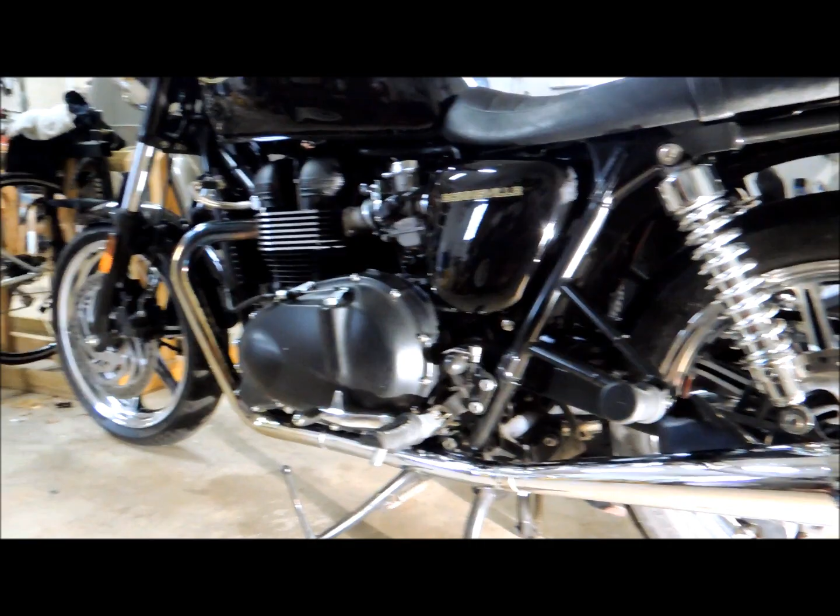I'm going to be doing the brakes on my 2010 Triumph Bonneville today. The rear pads and the front pads. And honestly, the pads are in fine shape. There's nothing wrong with them. But I wanted to just remove the calipers and take a look at what's in there as far as dirt and debris and clean them up a little bit. And while I'm there, the pads are so cheap that I'm going to replace them with some newer ones that should be a little bit better performance anyway.

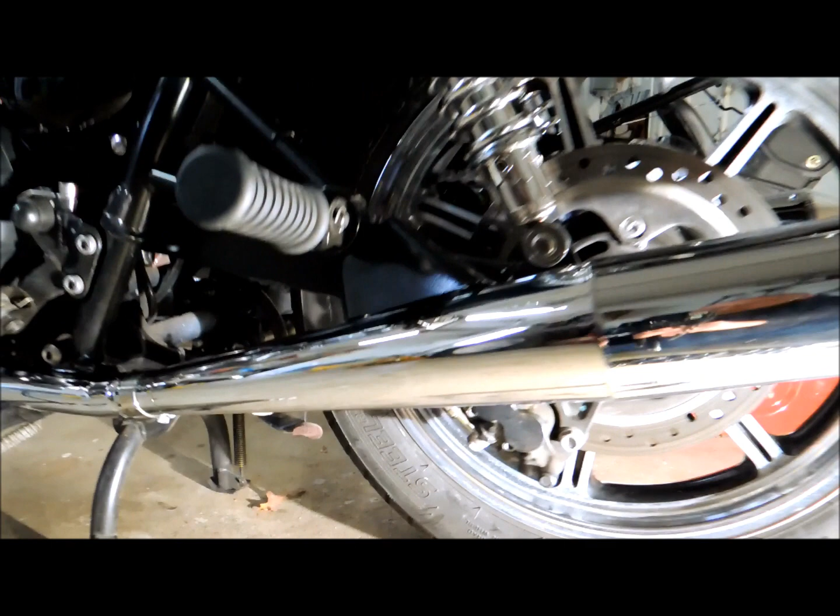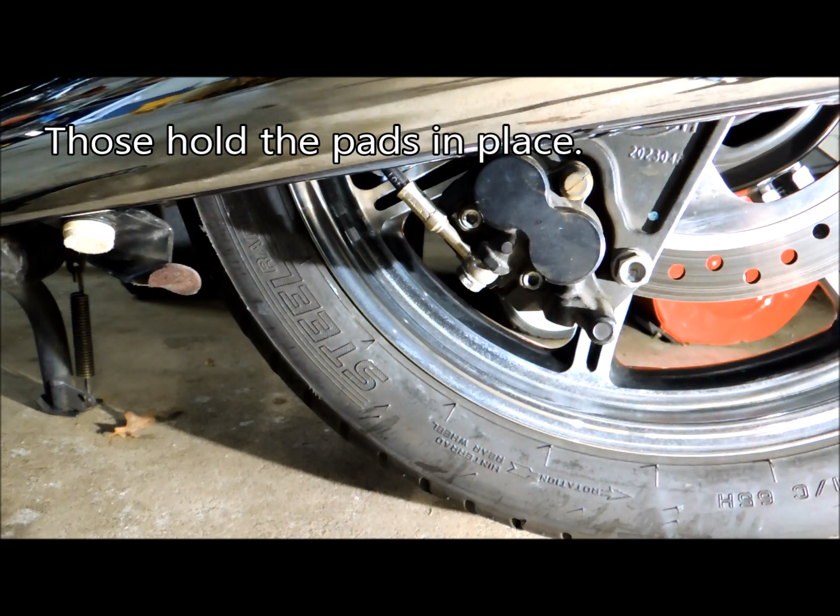So I'm going to start with the rear caliper. And I'm actually going to do some of this with the camera off because it's hard to get in there to see. But just to show you what I'm going to be doing, first there's two Allen bolts here, a 5mm Allen bolt here and here. And I'm just going to loosen those with the caliper still on the bike just because it's easier to do that. And those are what hold the pads in place.

And then to remove the caliper to get at the pads, there's a bolt here and one more up here you can't see off camera, which is a 14mm, and I'm just going to remove those and drop the caliper down. Sometimes it's easier to take the exhaust off, but I'm just too lazy to do that, so I'm just going to leave it in place. So let me remove the caliper and then I'll put you back on camera. I'm trying to give you another shot here.

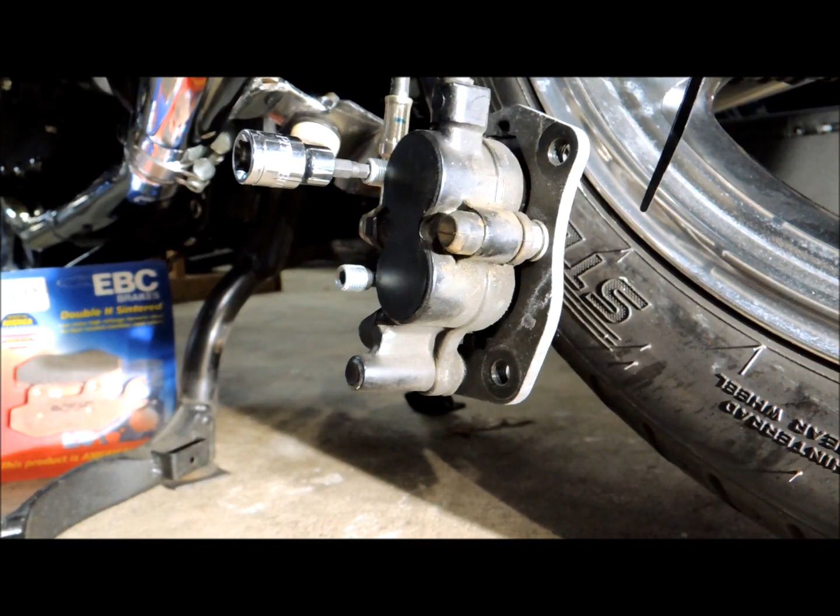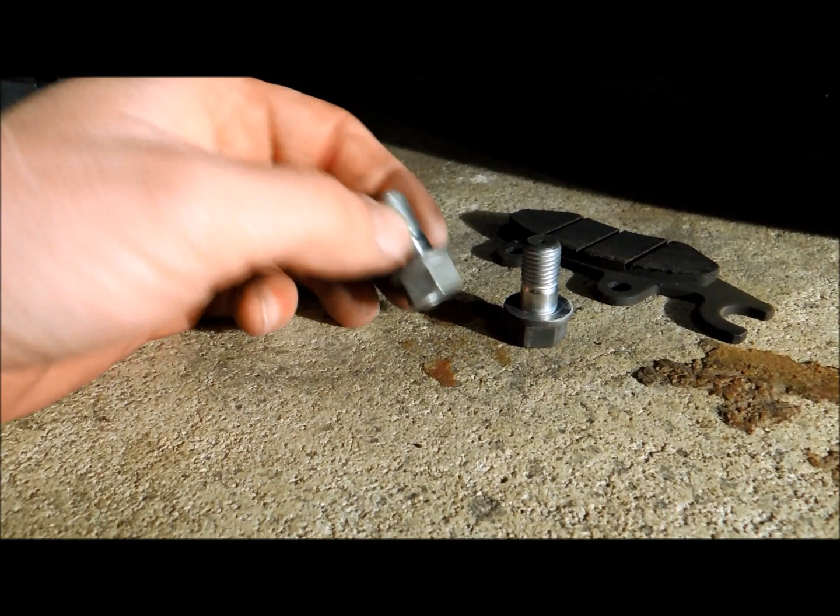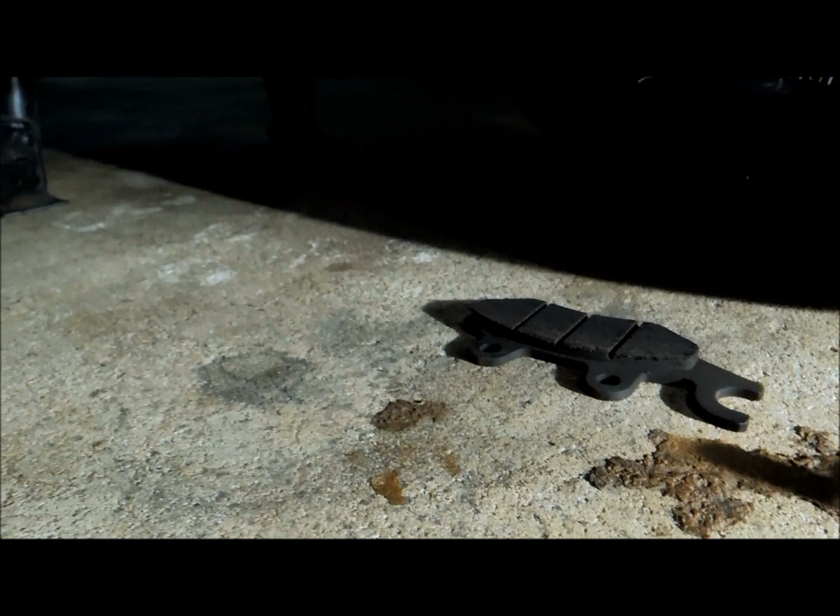I've got the caliper off, and that's from these two little bolts right here, which are actually quite clean and were not difficult to get off, which I'm pleased about. I actually have one of the pads out, and you know it's not bad at all. There's definitely more life there, but I did purchase new ones because they're pretty cheap. So since I got this thing off, these may be slightly better quality than the ones that came stock, which is what I got on here.

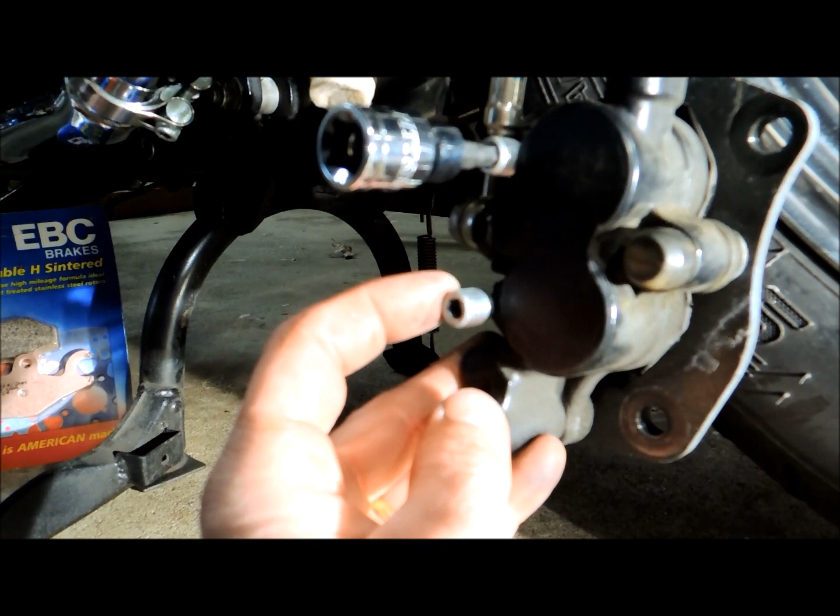And right now I'm just removing those two bolts that hold the pads in place. It's a 5mm Allen wrench, as I mentioned. I'll try to get a shot in here. You shouldn't really leave this caliper hanging, but that's what it looks like. You can see the bolts, that shiny bolt there on top, starting to come out. So let me just finish removing these and put the camera down for a second.

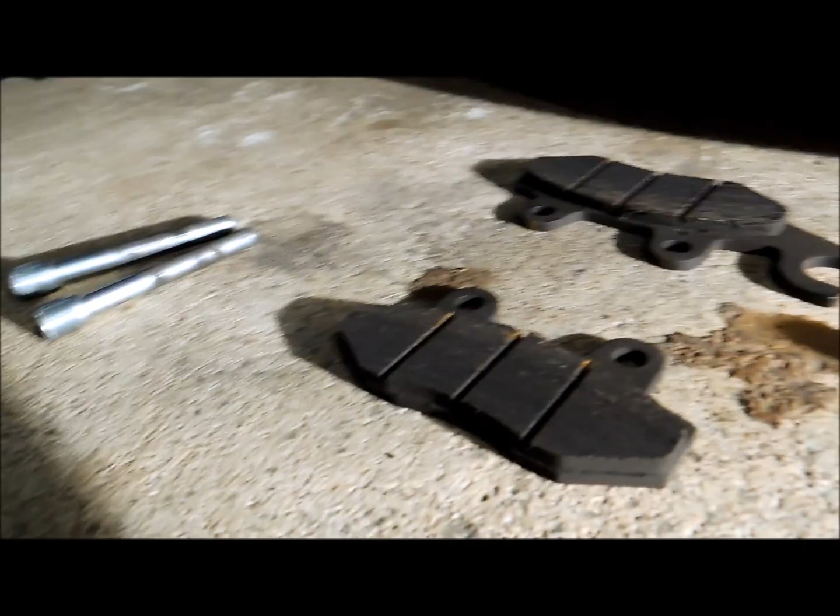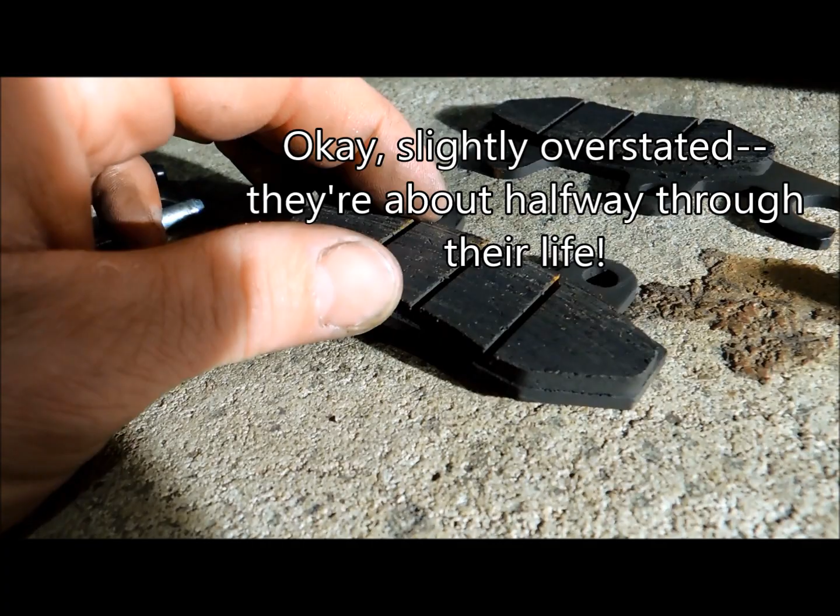Okay, I have the pins out that hold the pads in place, and they're in good shape. I didn't want to see any corrosion, and there's just a little bit of dirt there. It's nothing big at all. Those look excellent shape. So I'm just going to clean them up. And again, these pads are practically new. I mean, they don't need replacing, but it was so cheap to buy the new ones, so I'm just going to replace them. And I'll show you the inside here.

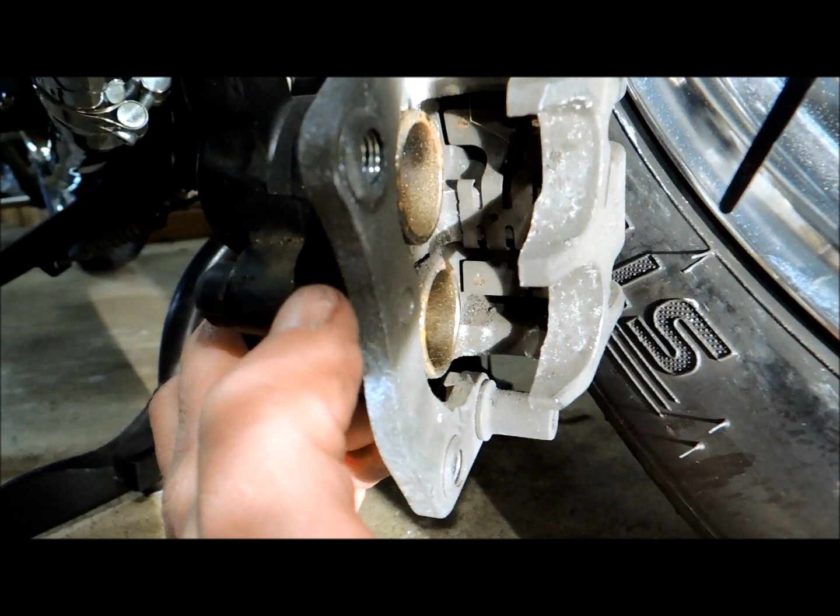Oh boy, it's hard to get the camera in here, but notice there's a spring clip. You want to make sure that's in good shape. And when I put the new pads in, they may be slightly thicker. So I'm going to want to push these pistons back in. And I'm going to clean off the caliper just with warm soapy water in here just to make sure there's no dirt on the piston itself that I'm pushing into the seal.

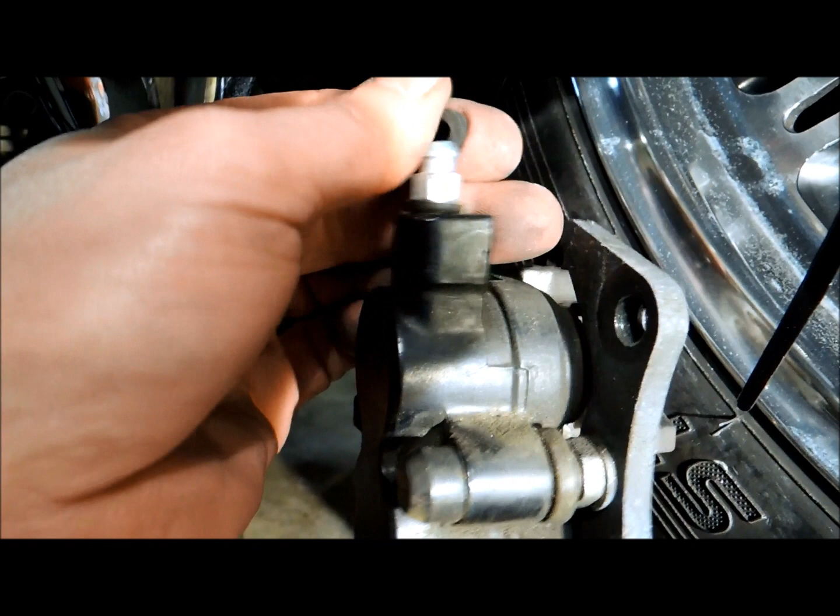And then I want you to pay attention to this right here. I'll take this little rubber cap off, and that's the bleeder, which I am going to use because I want to make sure I replace all of the brake fluid in there with new brake fluid, which is a good idea to do as you're changing the pads.

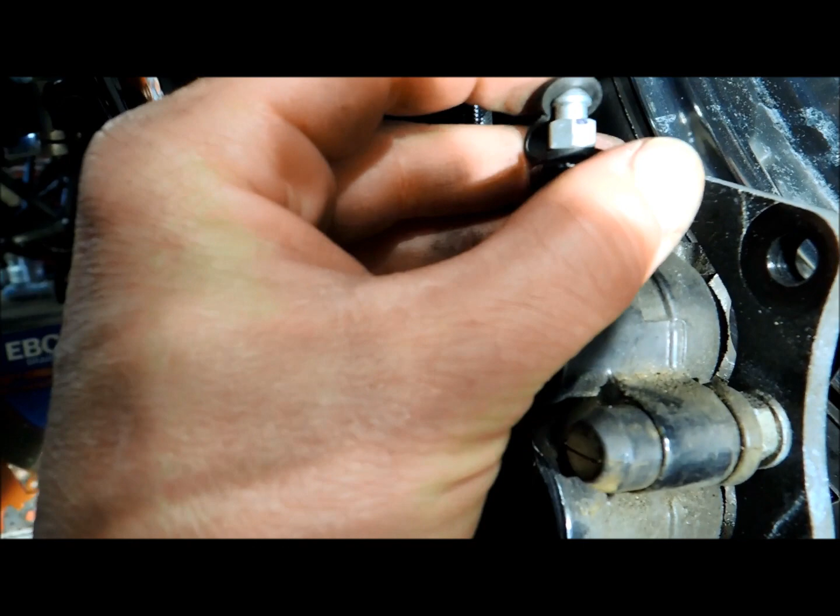This is a 2010 and I'm recording this in 2014. There's about 7,000 miles on this bike, I guess, or a little more than that actually, maybe 7,500. So again, it's in very good shape, and I was hoping not to see too much corrosion or anything here, and I don't, so I'm very pleased with what I see.

But it's just a good idea to keep this clean, and you do some maintenance once in a while. And for the cost of the new pads, I don't mind putting some new ones on. The fronts may be a little bit more worn, we'll see in a minute, but I'm just going to clean this up with some warm soapy water and we'll put it back together.

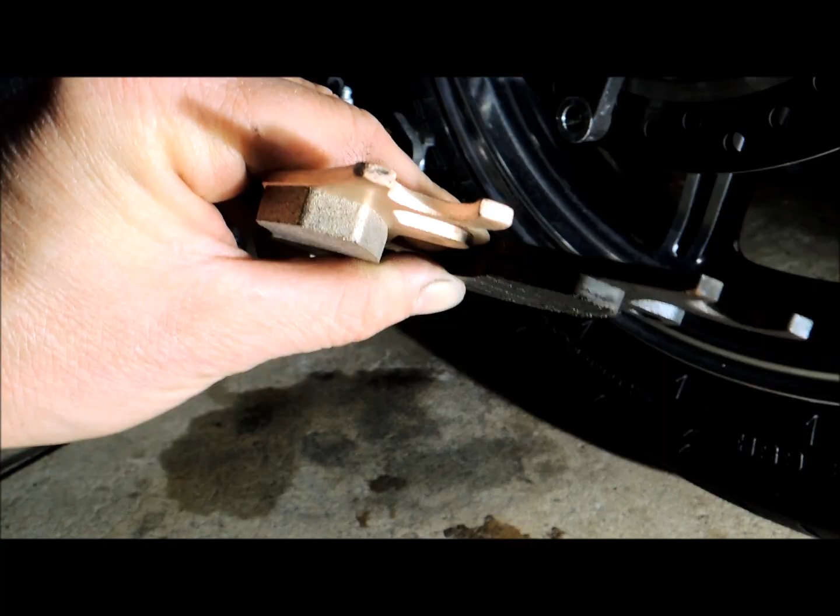Just try to give you a better shot here of the new and old disc pads. It's pretty tough to see here, and I'm trying to hold it with the camera and the light and everything, but the new pad is actually not quite double the size of the old one. So there is some more wear there than I was aware of, but there's still plenty of life on the old ones. But the other thing I wanted to make you aware of, I've now cleaned this up.

Let's see if I can get the camera in there. And I got one pad in there. There's springs, you want to make sure that the pads are seated correctly in that spring in the back there. Other than that, this is pretty simple. I made sure the pistons can move easily, so I could move it back and forth with my fingers, and then I pushed them both in so that I can seat the new pads, which are a little bit thicker.

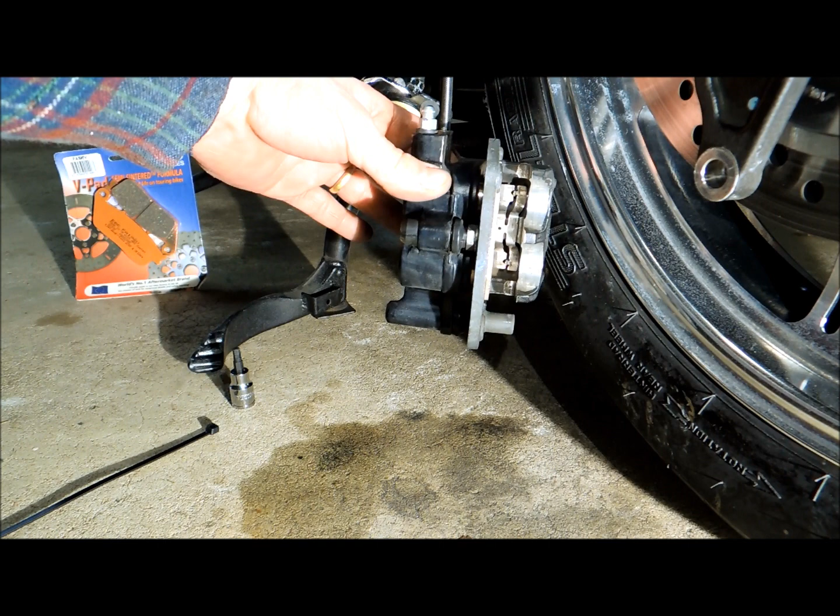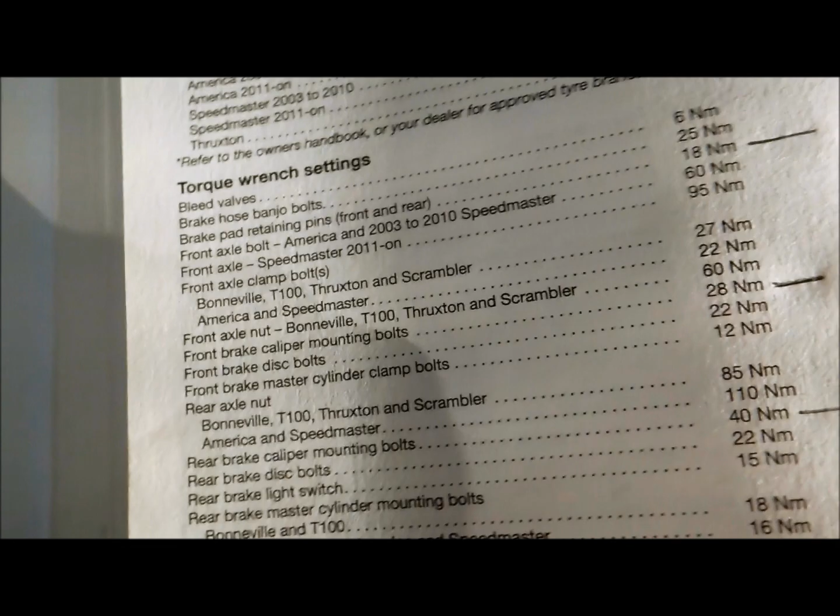And other than that, it's just a matter of putting the new pad in, and then we'll remount the caliper on the back here. All right, as I'm tightening this caliper back up, I just want to give you some information that might be helpful for you. They do give torque wrench settings, although it's in the wrong format for me, so I've converted it over here for what I'm doing.

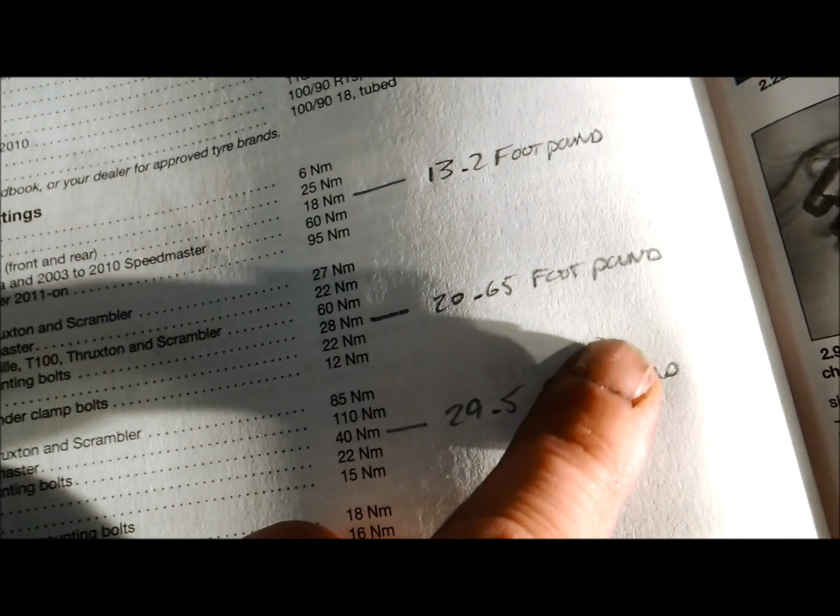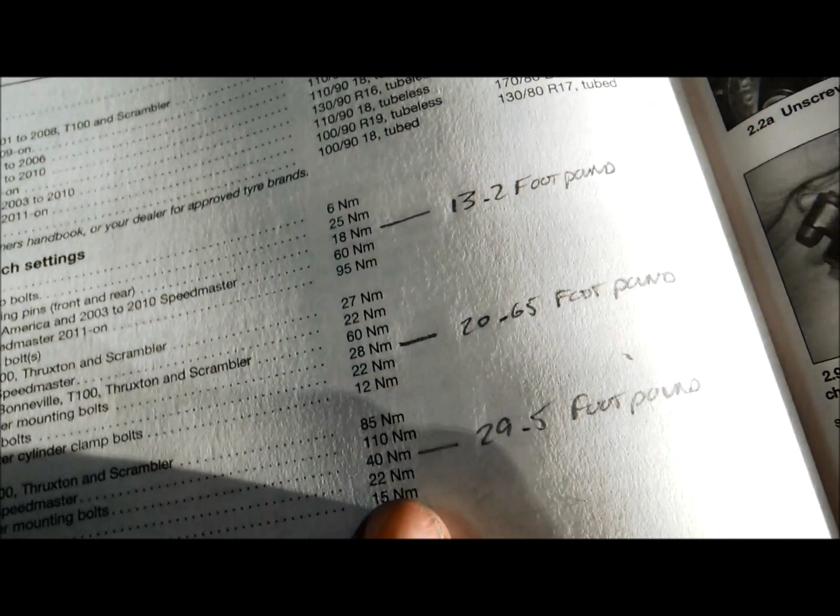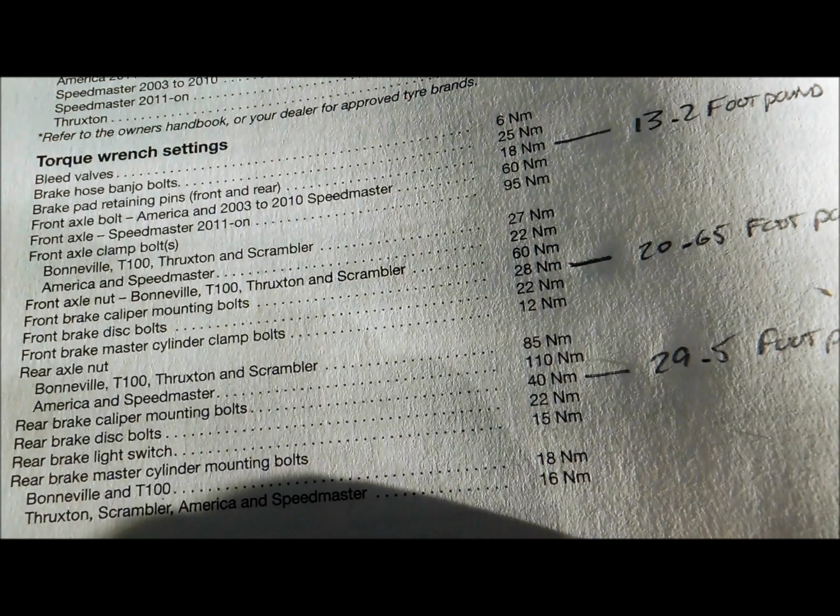The pad retaining pins on the front and back are 13.2 foot-pounds. And interestingly, the front caliper and the back caliper have different settings. I'm not sure why, but the rear caliper is 29.5 foot-pounds, and on the front, when we get to that, it'll be 20.65 foot-pounds for the bolts that attach the caliper to its frame there.

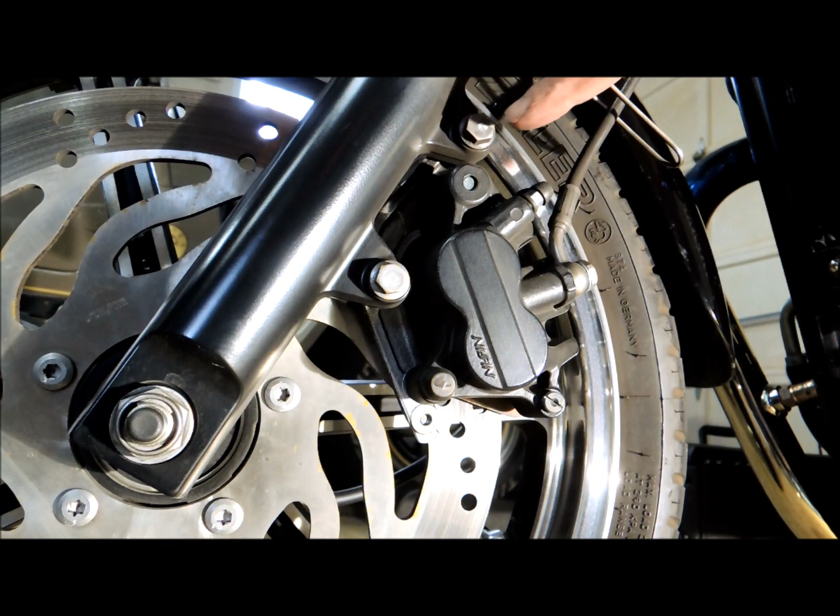Okay, I'm here on the front now, and this is going to be a little easier to show you on camera. Again, there's two bolts that hold the caliper on here and here. This time they're a 12 millimeter for some reason. I don't know why they can't standardize on that. And then there is a little pin that holds the pad in place here, but it's covered up with a little plug, I guess for corrosion. I'm not sure why. So you got to, boy, I got to go look for that.

You take that little plug out first, and then you're back to the 5 millimeter Allen wrench. So I'm just going to loosen that up just so it's not difficult. And then switch to my 12, and we'll loosen up these bolts, which aren't really that tight. Alright, now let me just move the camera and get this caliper off the way. I'm trying to get some better light for you.

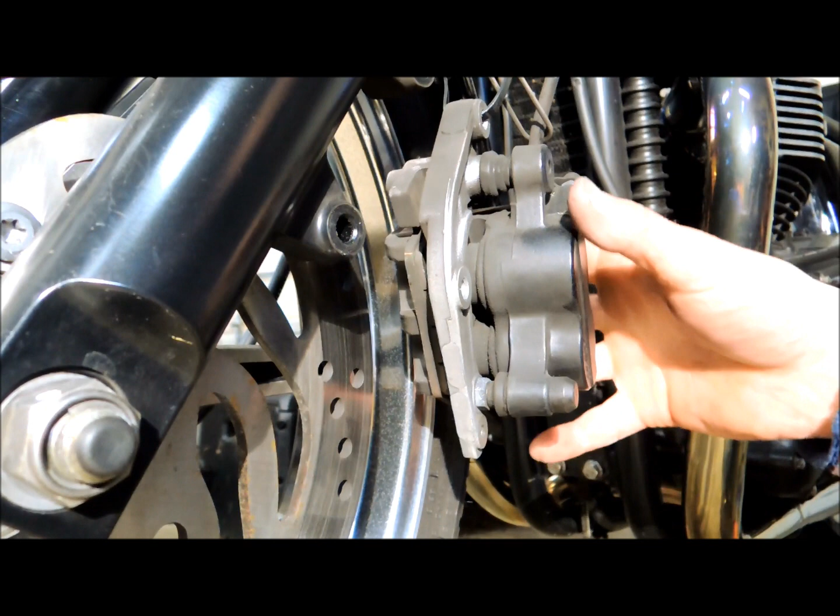I've got the caliper removed now. Up here, I don't know if you can see that on camera, I have a little plastic tie that I've tied off to the bike up top here, just so the caliper's not hanging on the cable. So hopefully you can see this, but here are the old pads in place. And again, it's not any emergency, although they are somewhat worn. It's got 7,560 miles on it, I just looked.

So we're just going to take these pads out. Oh, I didn't take the pin out yet. That'll help. First, we've got to take this pin out in the bottom, which I loosened when it was still attached to the bike. And just like the rear, you got to remove this totally. It's under a little bit of spring pressure, so it's kind of a pain to get out. There. Alright, so there's the pin. Looks like it's in good shape.

And the pads just pop right out. And these are the original pads. They're really not awful, but they are getting down there. I mean, I could get more life out of them, but I'm not that cheap. So the new pads are here. Let me just get these open and we'll put them in.

Alright, just like I did with the rear brake, I'm just going to give these things a little bath. Don't want to lose that spring there. And I'm mostly concerned about this area right where the pistons go into the seals. I don't want any dirt or stuff in there to damage the seal. So I'm just going to clean this out with some warm soapy water, and I'll probably dry it off with some brake clean just to make sure all the water's out of there and we're in good shape.

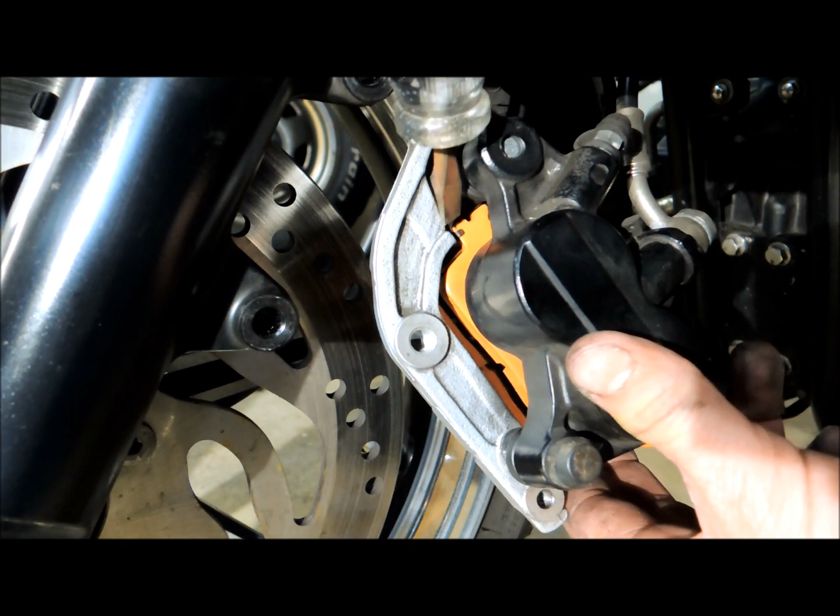And then up top, boy, I don't know if I can get this. Make sure there's a spring up here. I need something to point with. There's a spring up here, and there's just a little tab right there. I don't know if you can see it, but that needs to be kind of holding the pad in place. So as long as you get those two springs correct, there's not much else to go wrong.

Oh, and by the way, I did check the pistons, cleaned them off first, and then pushed them all the way back into the cylinders after they were cleaned, so I didn't damage the seals. All right, so I'm just going to put this back on the fork of the bike, get it mounted, and then we're going to talk about bleeding.

Okay, I've got the front caliper back on, and now I want to bleed the brakes. The reason for this isn't that there's air in the lines. I mean, it's fine as far as that, but over time, brake fluid can get just dirty and dingy, and it can absorb water, I guess, even though it is a closed system. And it's just a good idea as it wears down to replace it with new fluid.

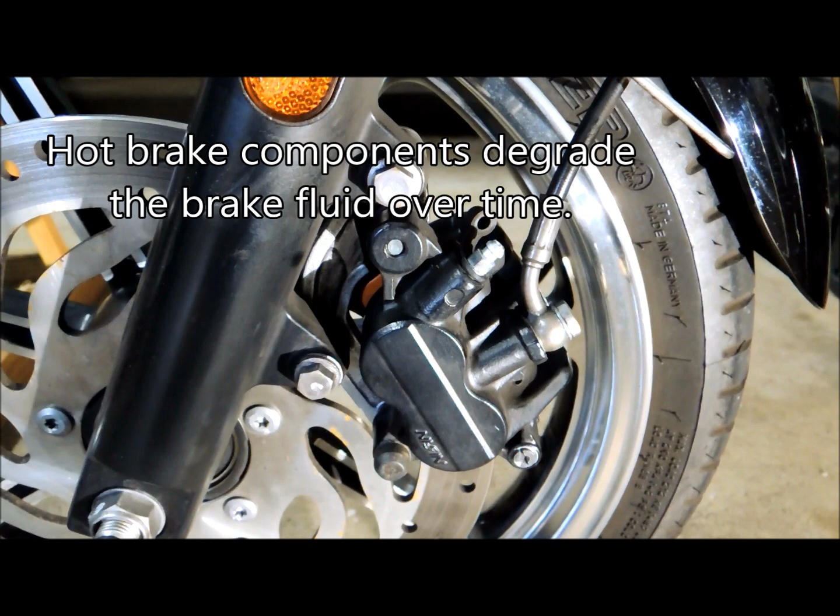And Triumph recommends this. What we're using is DOT 4, which I think doesn't absorb water as much as DOT 3 used to in the old days, but it still goes bad over time. So you want to replace it, and it's not that big a deal.

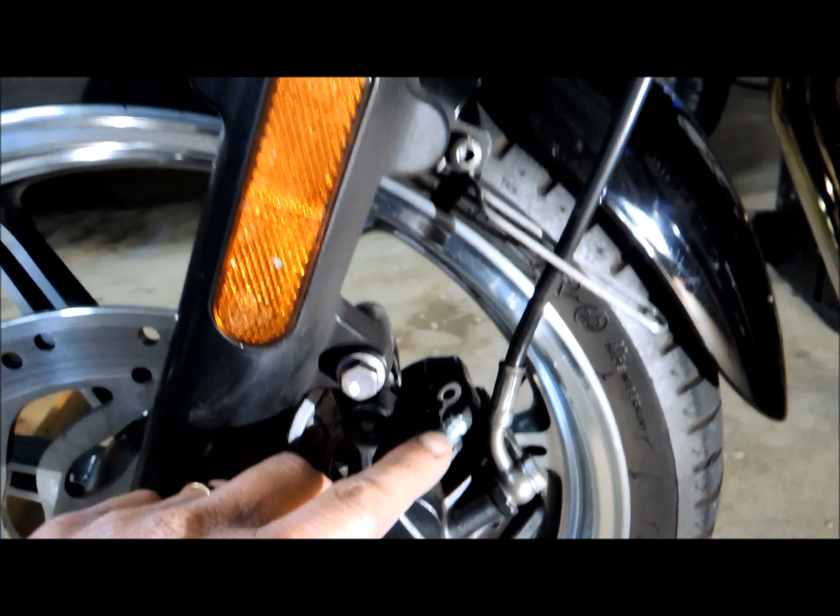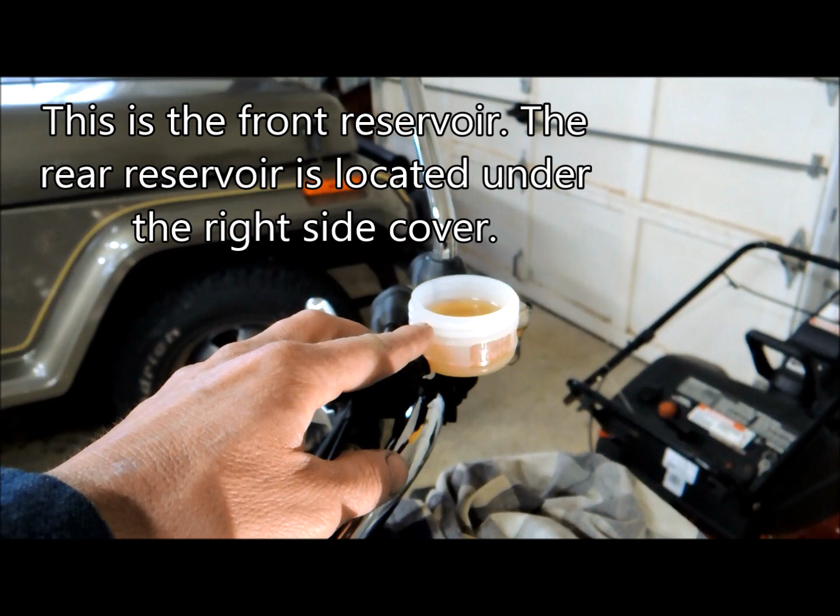Right here is the bleeder, and this is a closed hydraulic system, so if we go up top here, I've opened up the reservoir here, and actually you can see the fluid's a little bit yellow, and that's how you can usually tell when it's getting old. It gets a little yellow or brown. So I'm going to replace that, and it should be a much clearer liquid when we're all done. Now, the last thing you want to do is introduce air into the system.

So there's 3 ways that I know of to bleed brakes. One is you get a helper, and the helper pushes down on the pedal or pulls the lever, and then once that pressure is on the system, you take a wrench, you loosen this bleeder screw, which is hollow in the middle, of course, and the brake fluid will spit out. And then you need to retighten that before the person helping you is finished pulling down all the way, because otherwise air could get back in the system.

So it's a continuing cycle of pulling the brakes, loosening the screw to let some fluid out, tightening it back up before the lever hits bottom, and then you just repeat that cycle, and the fluid will eventually come through. And that's the old school method of doing it.

A newer method, which I prefer, but I'm not prepared to do today, is to replace this bleeder with what are called speed bleeders. Basically it looks just like this, but it's got a check valve in it, a ball bearing check valve, so fluid can only go one way. With that system, you loosen this up a little bit, and you can just pull that lever or push the pedal down repeatedly, and fluid will come out, but air can't get in because of that check valve. And when you're done, you just tighten it back up.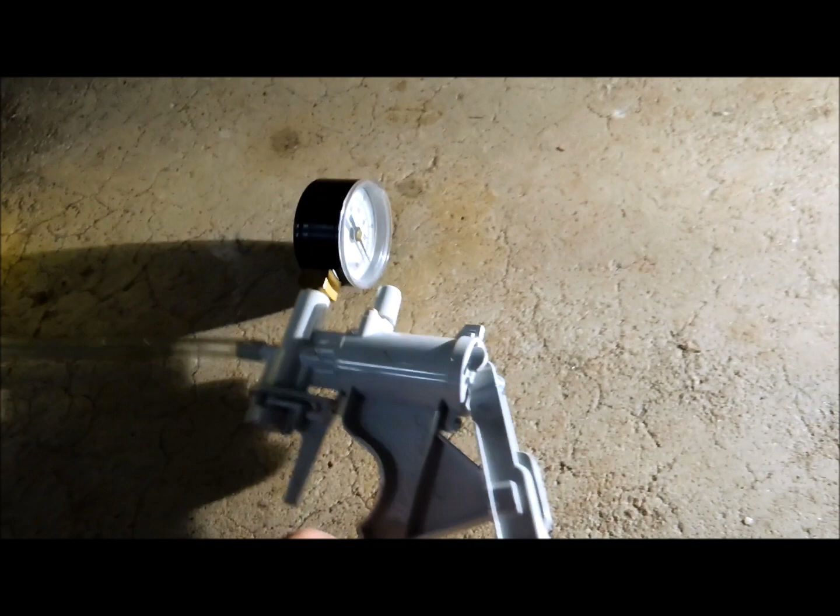Those work great, especially if you're alone. But I don't have that with me right now, and I'm not prepared to go out to the parts store and buy them. So I'm going to use a third method, which is this little device here. It's made by MityVac, and there may be others too. But basically, this is just a vacuum. It's used actually in automotive applications for creating vacuum or measuring vacuum. You pull this lever, and it creates a vacuum.

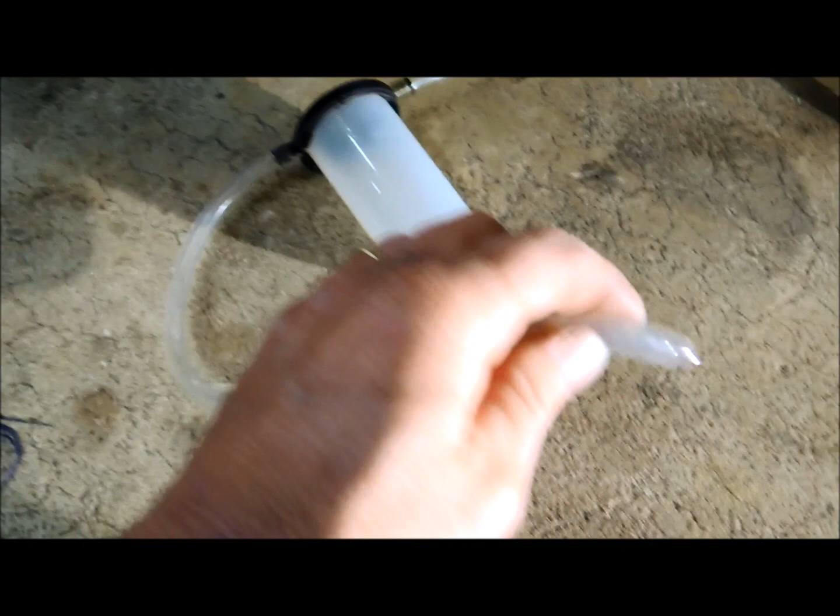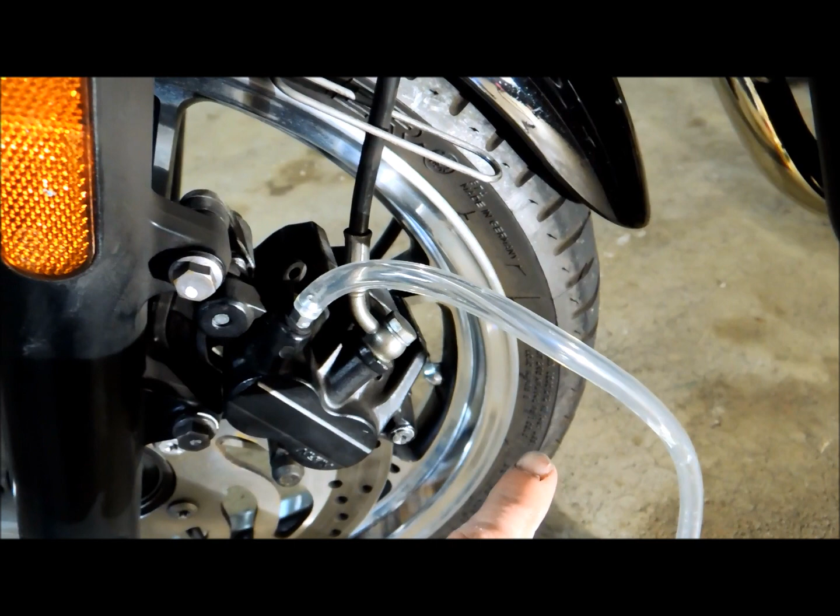So that tube is going to be connected to this little cup here. And then the rest of that tube goes here, and I'm going to see if I can do this with two hands here. I'm going to attach the end of this tube to the bleeder screw. So what happens is I pull that lever and create vacuum. Then I open up the bleeder screw, and the fluid will come out, but air can't get in because I have attached this tube here.

And then again, it's just a continuing cycle of creating vacuum and pulling the liquid out. I have this clear tubing here versus like a vacuum hose, which is opaque, so that I can see the fluid coming out. Because once I see the fluid is coming clear, then I know I'm good enough. And I also want to make sure that I don't see air bubbles coming through there as well.

Now, as I'm doing this, I need to pay attention and keep filling the reservoir so that I don't run low. But basically, I'm just going to pull that vacuum, pull the liquid out, and as I'm doing that, I'll clear the system. And I'm going to do the same thing in the rear. That way I get rid of all the old fluid and any air in the caliper on the front and the rear, and we should be good to go.

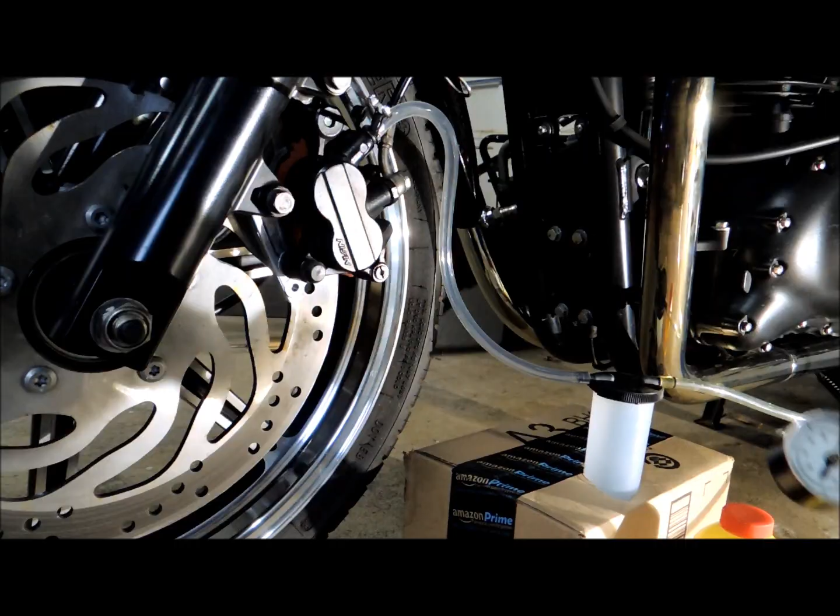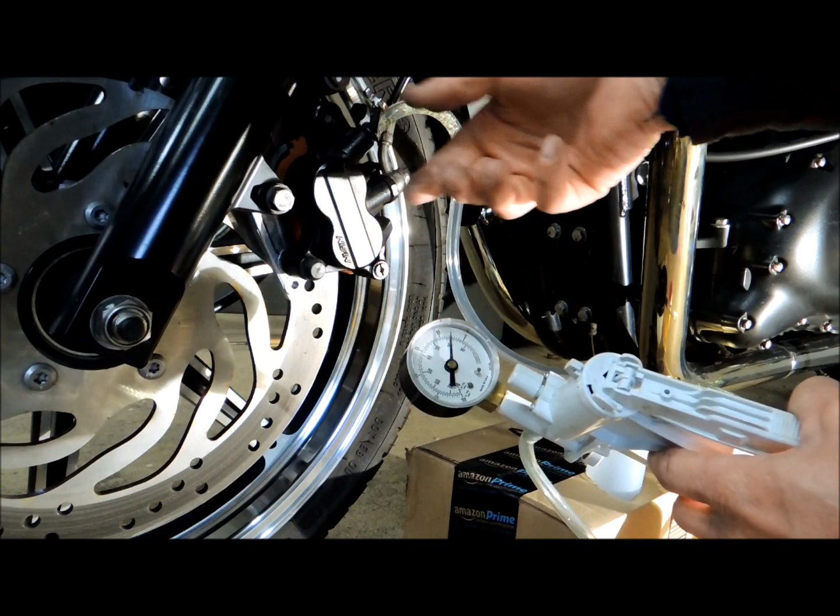Okay, let's see if we can give this a shot on camera. So I got some vacuum. I open up the bleeder. Here comes the fluid. I'm going to close it back up. There is some air there, but that's just because this tube is pretty big. Get some more vacuum. Open it up. There comes the fluid. Close it back up. I've been repeating this procedure until I get clear fluid coming out of here. This is closed right now.

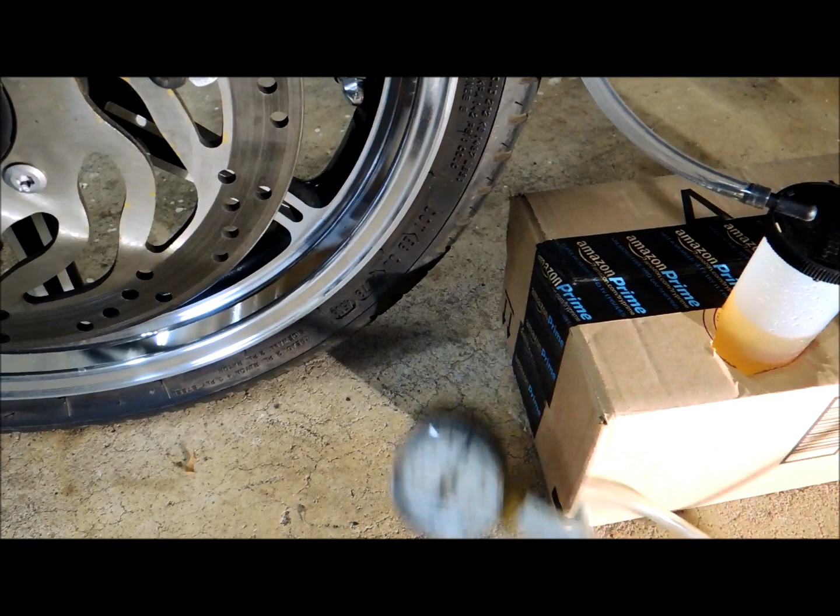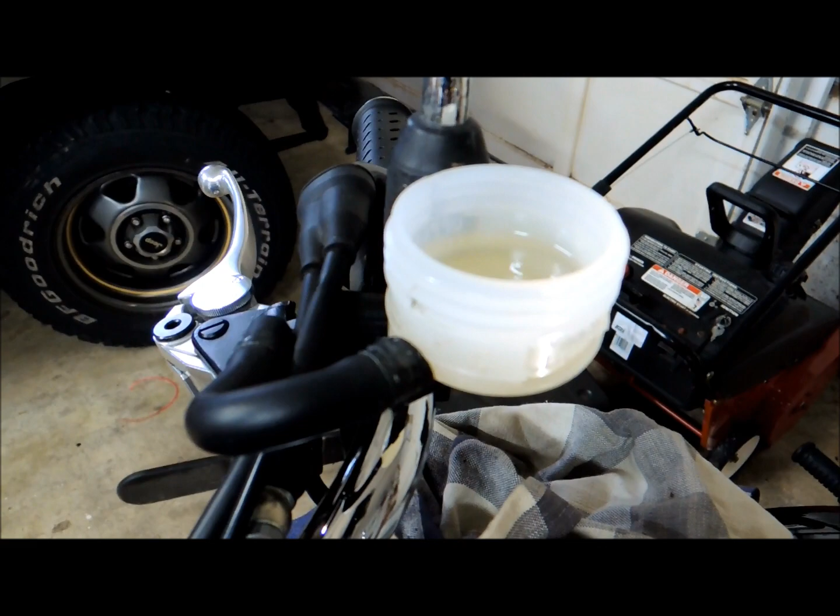And so I just make sure I get my vacuum up, and it's filling this container here with the old fluid, and it is quite yellow. I don't know if you can see that on camera. But if I bring the camera up to the reservoir where I've been adding new fluid, you can see that's pretty much clear. So it is definitely older fluid, and it's making a difference. So I've done this for the front now, and now I'm just going to repeat the same procedure for the back, and we'll be good to go.

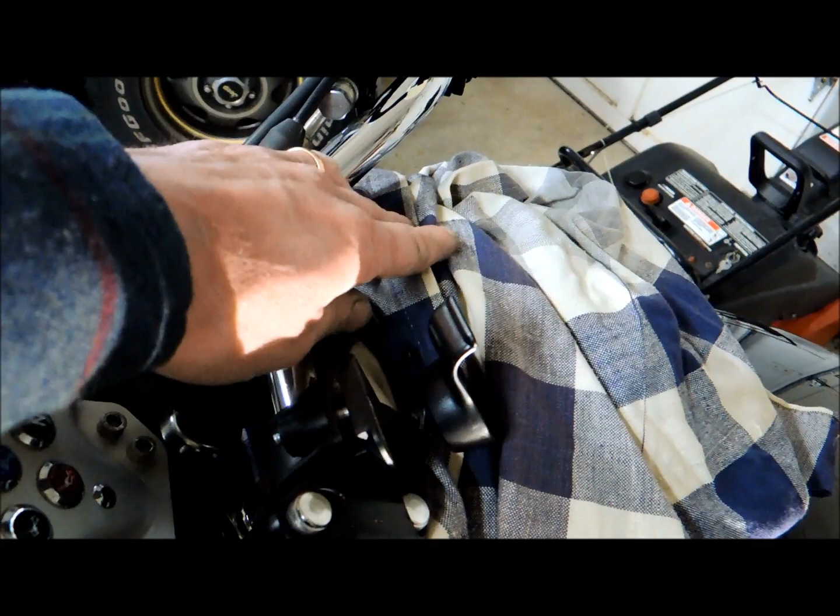And obviously when you test these new brakes out, you want to take it slow, let them break in for, I don't know, a couple hundred miles, something like that, before you go crazy. Incidentally, with brake fluid, I'm not positive about DOT 4, but I know DOT 3 used to be highly corrosive to paint. So make sure you put a nice thick rag down in case you drip it. And other than that, you should be good to go.

So the brake job's pretty easy on the Triumph. I have to say, I wish all the brake jobs that I do go this easy. So I'm pretty pleased, and we'll see how these things perform.